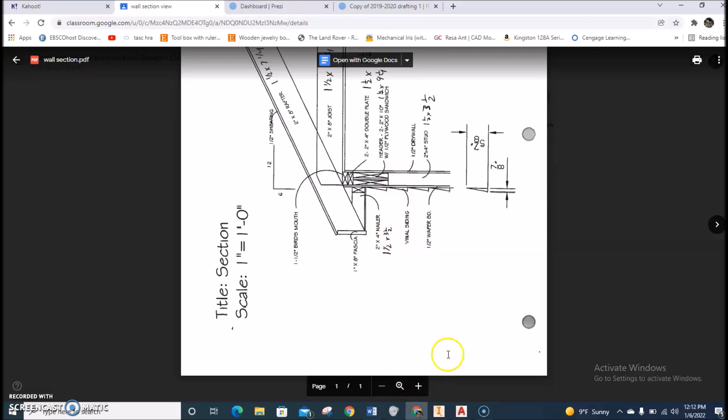Okay, so you're going to be doing this section view drawing right here. I will fix it and make sure it is facing upright. I thought I did that once, but apparently it did not like to be rotated. So, or just use a hand sheet that I'm probably going to give you if you look over your shoulder.

I'll give you one as well. So, but I will refer to this one. Actually, I have it loaded somewhere else, so let me get that for you. And there it is. So, you are welcome to use this. I will refer to this quite often throughout this process.

Just so you know, I'm also doing this at my desk right now. I might be at my desk. You don't know where I am in life right now.

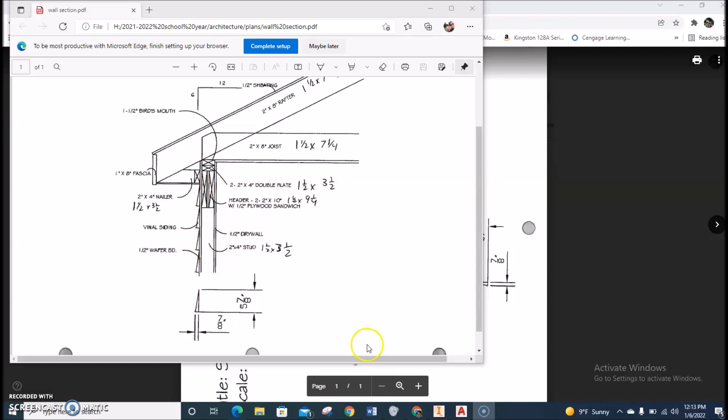But remember, it is one inch equals 1 foot. So that should be pretty easy to be able to figure out how tall these things are. So if you want to reverse engineer this, which we will need to, otherwise follow along and you'll be good.

Highly recommend, if you did the last template, to download this one. I fixed some of the text. I hope so, so that won't be such a pain in the butt this time. If not, I'll reload it later on, but it'll be fixed by the time you do it.

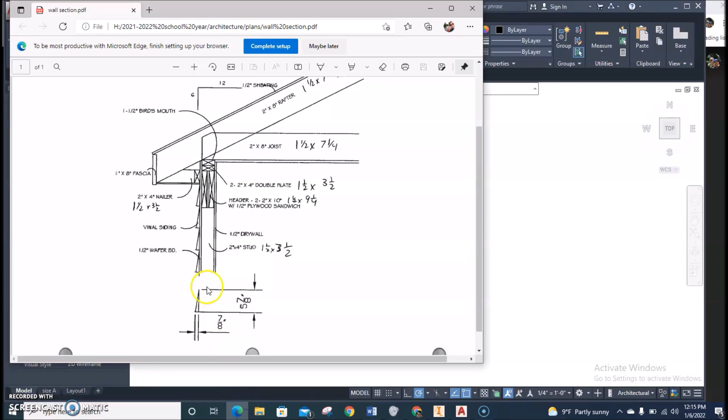So first thing we're going to do is we're going to start off by drawing this wall right here. So as you see here, there's a 1/2 inch drywall, which is actually 1/2 inches. There is a 2x4 stud, and some headers and some double plates and some siding and stuff like that. So I will help you get this lined up.

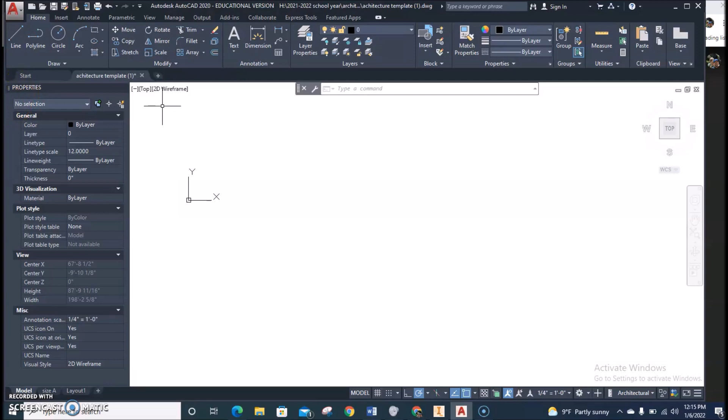Okay? So here we go. You're going to start off, and I'm measuring this on my desk, so give me 1 minute to get your first measurement on this one, and it is 2 feet 6 inches. So your first line is going to be 2 feet 6 inches going up, and that is the side of the wall. We're going to offset this in 0.5.

So click and go to the left. That's my drywall. We're going to offset again, 3.5. Click here, go over, click. There you go. That is your 2x4.

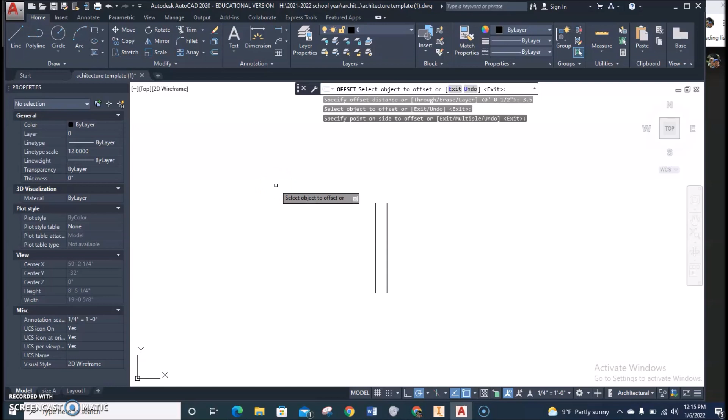Remember, the 4 inches is not 4 inches. We live a lie. It is actually 3.5 inches. So next, we're going to offset 0.5. This is OSB. If you don't know what OSB is, that is particle board, the short term for that. So that is.

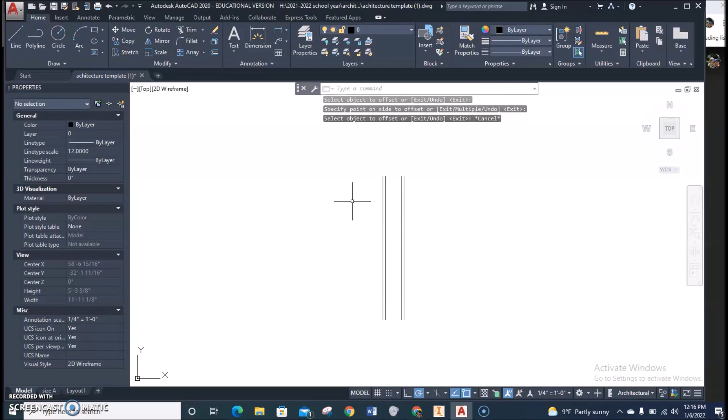Going over there, and I'll do the vinyl last. That's the least of my concerns right now. I will do that later on. So now we have our.

Wall complete. Now we need to work on getting in the headers as well as the double plates on top. So next step is to work on this area right here. Before we can move on, we need to draw the top part of the ceiling right here, which will give us this little double plate height right there.

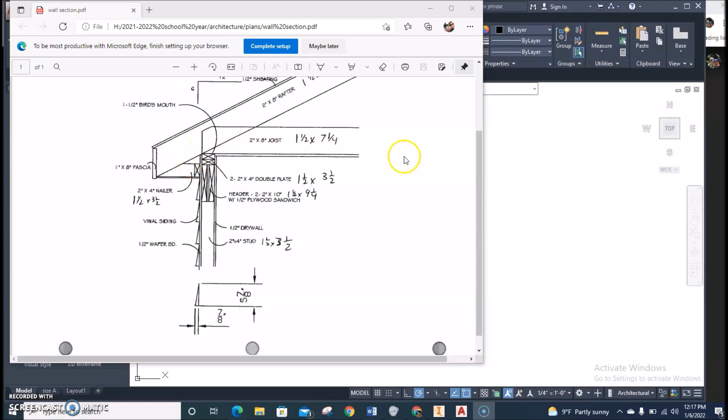So that is, once again, 1/2 inch drywall. So what I'm going to do is I'm just going to draw a line from the inside of the drywall over. Doesn't matter how far, not really, but if you need a measurement, I think I'm going to go about 3 feet. Yes, 3 feet over.

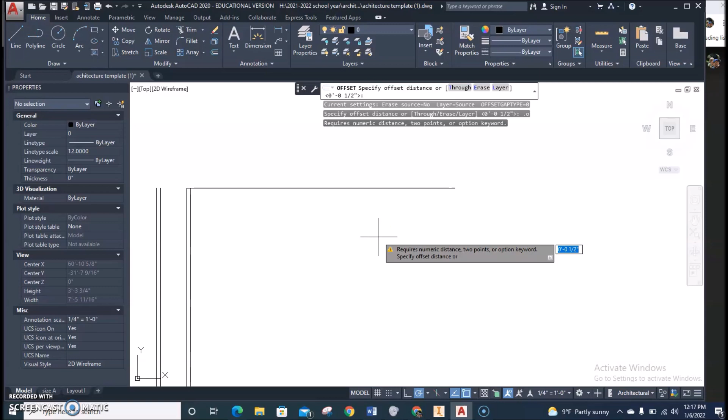About right there. Then offset that up, 0.5 again. It's already set. And now we have the top of what will be our double plates.

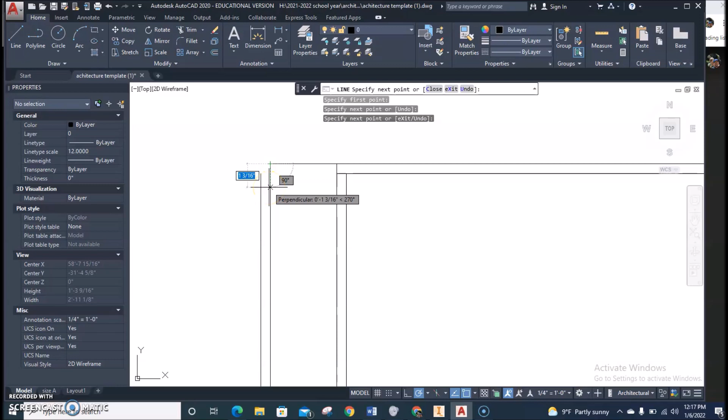So here we go for double plates. I'm going to extend this line going up here. Then this is the same width as this, so you can just go down like so. Okay, so this is 3.5 inches already because it's a 2x4 as well. I'm going to go down 1.5 inches, 1.5.

And attach that, then draw the little X here. I don't care if I overline this. You won't see it, no one will. Okay, we're going to do that one more time down here.

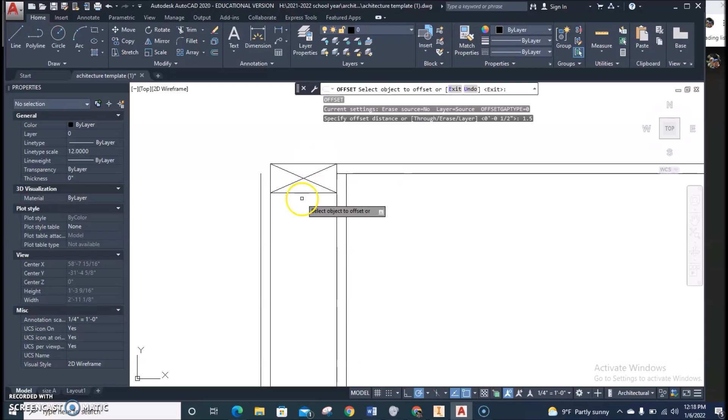I could make a copy of it, but it's just as fast just to draw it. So down 1.5. Actually, I should just offset. Offset 0.5—not 0.5, I'm sorry, 1.5. Take this bad boy, go down, draw the X.

Next are the 2x10s. Here's how we're going to do this. We're going to offset 1.5. We're going to take this wall and go to the left, and take this wall and go to the right, and you should have a little gap in the middle. Before I go any further, I'm going to trim this stuff up here.

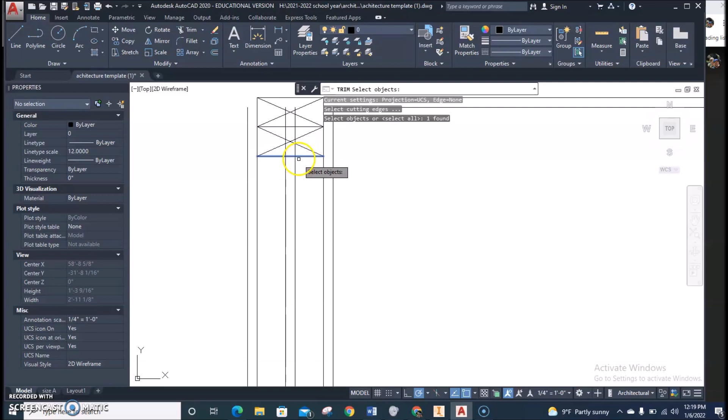And when I trim on these, I'm going to just hit TR and press enter once. Click this line here. If I press enter again, it will let me do a fence trim and get rid of all the rest of the stuff, so I don't have to worry about that. Okay, the height of these is the same, so they are.

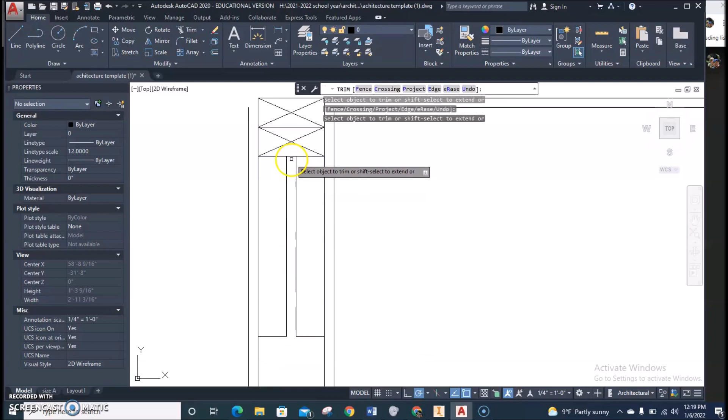9.25, so type offset 9.25. Click here, go down, trim it. And there we go. Draw your X on both.

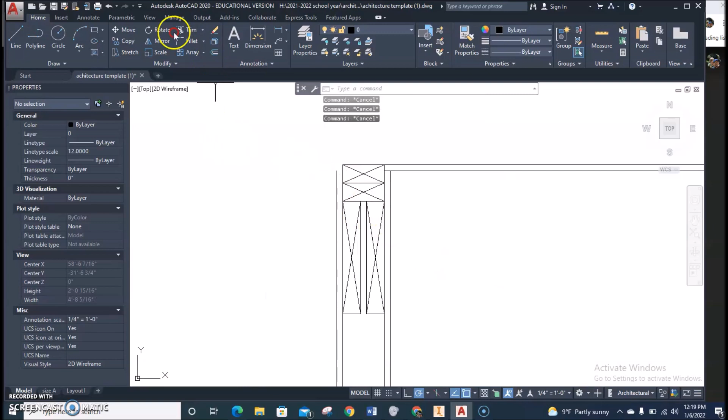And then you're good. It appears that this attaches to here. And we're good to go there. So you got this part done, hopefully. Hopefully things are rolling well for you in life and everything else. I'm going to worry about this area once we get this part over here done. I'll give you a minute to get caught up, and then I'll see you in a second.

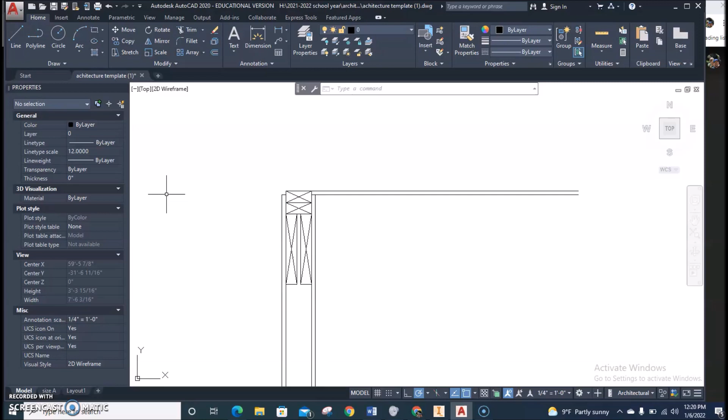All right, next we are going to do what's called a fascia. The fascia is this area that goes out from the house. It's not labeled on the sheet, but that's what it is, so trust me.

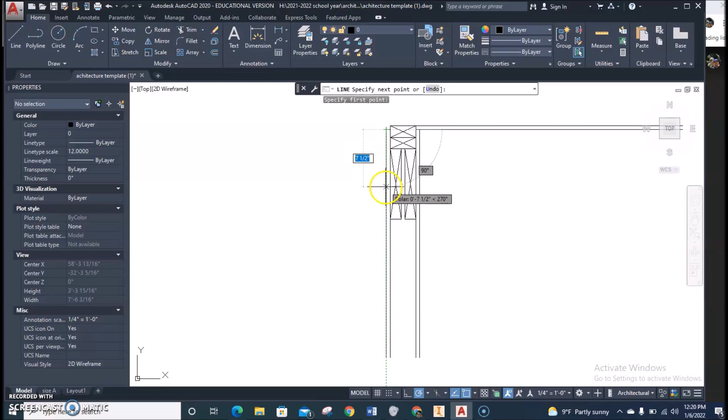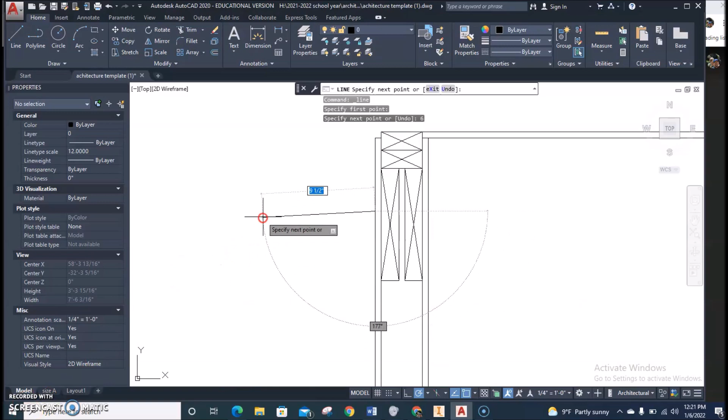So to draw this, we have to go 6 inches down from right here. If you click on this top corner right there, go down 6 inches. And then you're going to go out 1 foot, or 12 inches. And I'm going to press escape there. Next there's a small little board that goes underneath it.

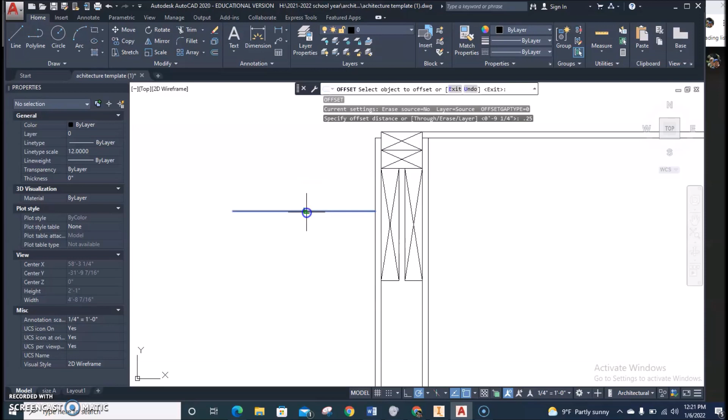I'm going to offset that 1/4 inch. That's just, usually that's the sheet metal that goes on there. We'll just make it simple right there. There we go. And then I can go ahead and attach this line right here.

Okay, next is something called the fascia. The fascia is the front of the house. I always think fascia and front are kind of the same thing. But I know it looks like there's a little bit of a ledge overhang, but I'm just going to tack this right up against here just to keep my life simple.

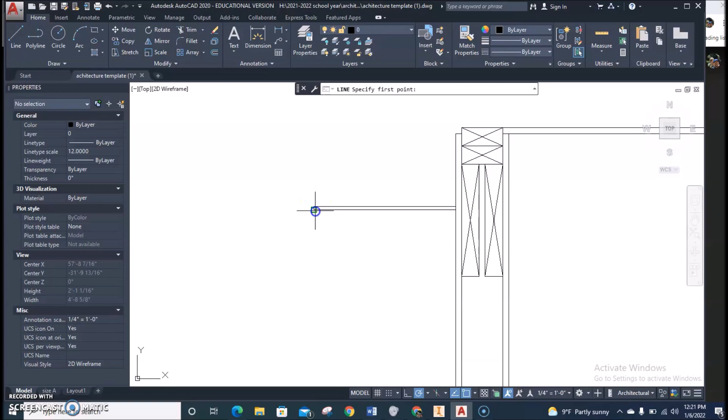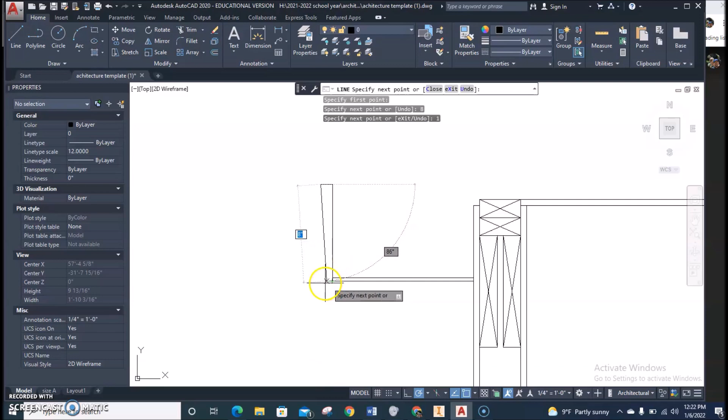So click on the bottom left-hand corner of your box here, go up. Now, a fascia is exactly as shown, it says 1x8, I need it 1x8, so go up 8. Go over 1. And box that out if you could, please.

I'm good with that. Okay, next is the roof. So if you're looking at your sheet here, so we got this part done there. So there's a 6-12 slope.

Now, if you're doing some geometry here, solve for the line or the angle, blah, blah, blah, we don't do that in my class. We do it the easy way. So here's how you're going to do this.

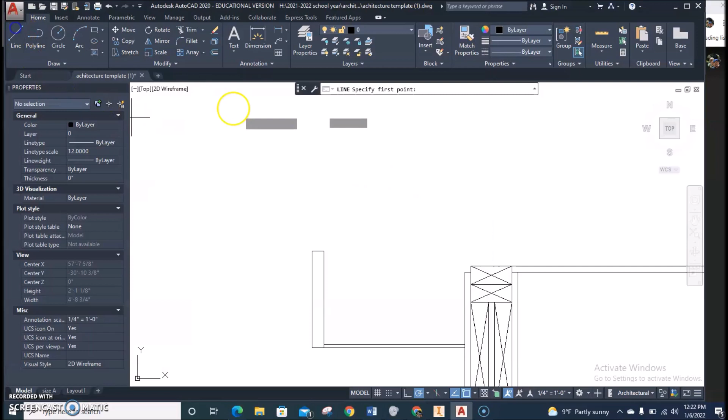I'm going to click on this corner right here. You're going to go up 6 inches. You're going to go over 12. Slopes are always something-12. So this one is 6 and 12.

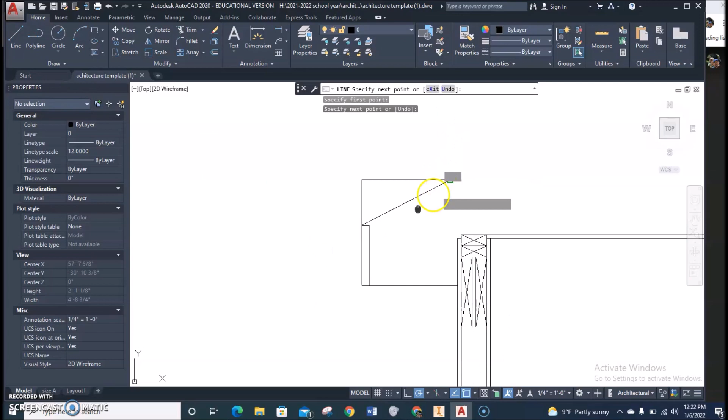So then what I do is I grab this, and now I have my line, and now I have my slope. You're thinking, great, that's fantastic. How do I get it to go higher? Well, that would be the lengthen command.

Remember this command? Did this back in the day? All right, you want to hit dynamic. What that does is if you click on it, it allows your line to be extended out without you changing it. So it doesn't matter really how far up and down I go, it just tries to keep with my line. So that's where I want to be at.

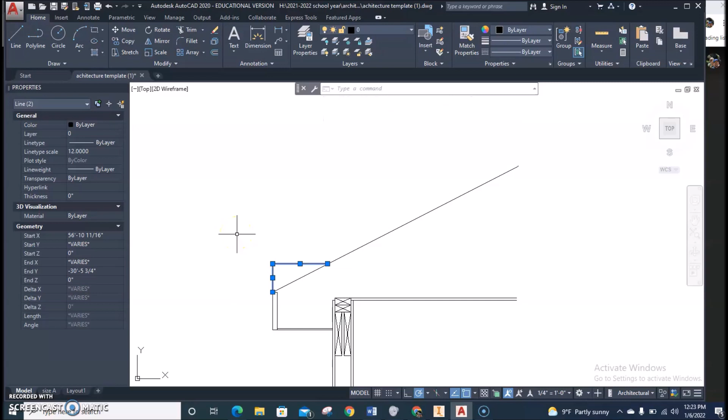Now, as for this, don't erase this, I need this still. I should slow down a little bit, I'm sorry, I'm going a little fast. We need to move this because this is going to be one of the things we use for notes later on, okay? So keep that.

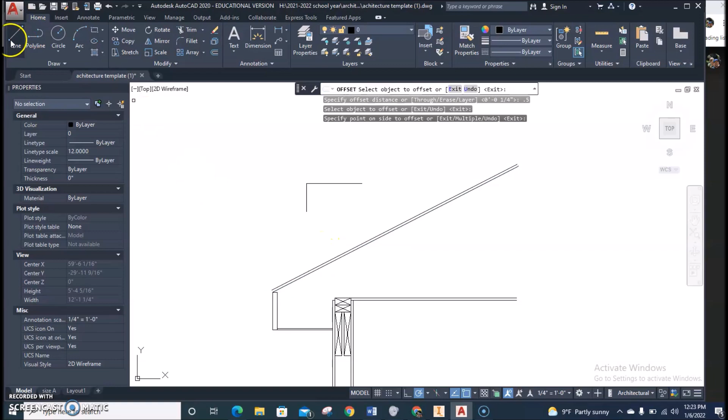Okay, next is the sheathing, which is your thickness of your roof. Usually that's an OSB as well. So offset 0.5, click here, go ahead and close the bottom part off. The top part can stay open because that should be a break or something like that, which I'm not going to worry about with something that small. Okay, you got that finished.

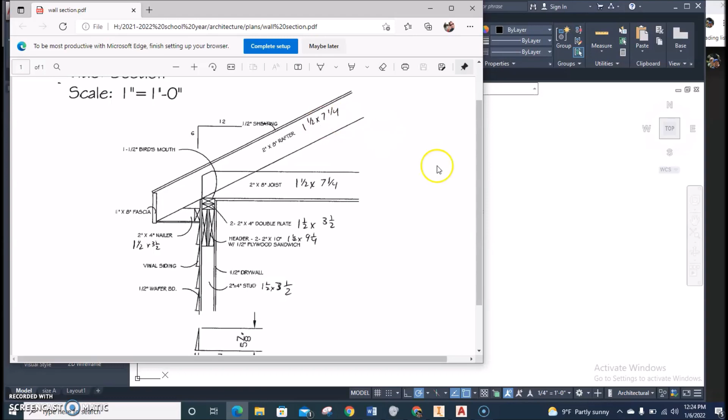Now, we need to have a rafter here, okay? So on my sheet, it says there's a rafter here that is a 2x8. 2x8 is actually 1 1/2 x 7 1/4. So offset 7.25 and click. Ooh, that went right on the edge.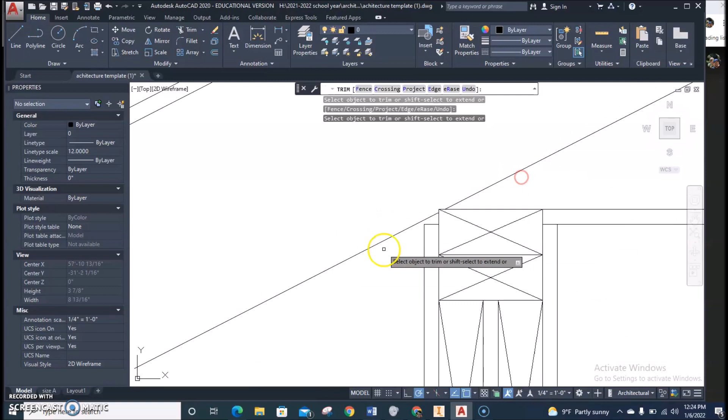That is perfect, good enough for me. Typically what you would do in this case is you would trim off this area here, but if you're not watching the video, it's fine. And then I'm just going to hold shift and extend that out to there, and that is absolutely beautiful.

Okay, we only have a few more things left to do here. Next is the 2x8 joist. So I am going to just leave my offset to where it was, which was 7.25. Press enter, click that, go up and click.

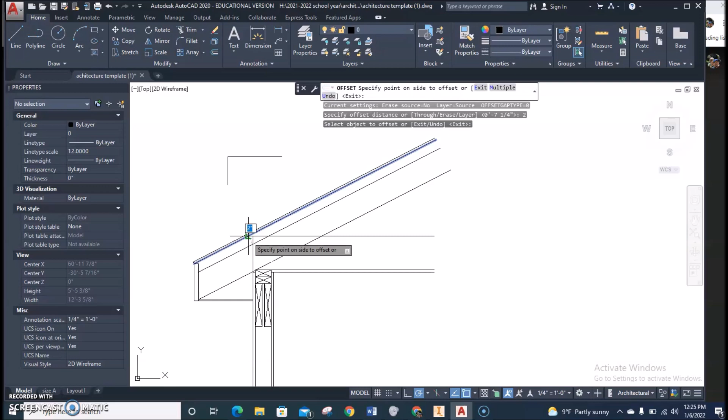Now I'm going to do a little fillet because I want to attach these two, but I'm going to do something else to it here in a minute. So fillet, boom, like this. Now you'll see how it's at a little bit of an angle on your sheet, so I'm just going to offset that down. Let's go 2 inches because it cuts into it.

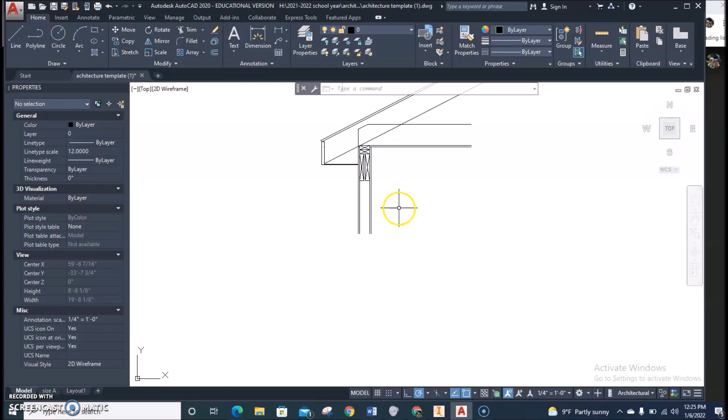So here's how we do that. We're going to start off and draw a line. I'm going to do mine over here on the side just so I can copy and paste it, make my life easy. I'm going to go over 7/8, so 7 divided by 8. It would help if I would have drawn a straight line. 7 divided by 8, go up 5.

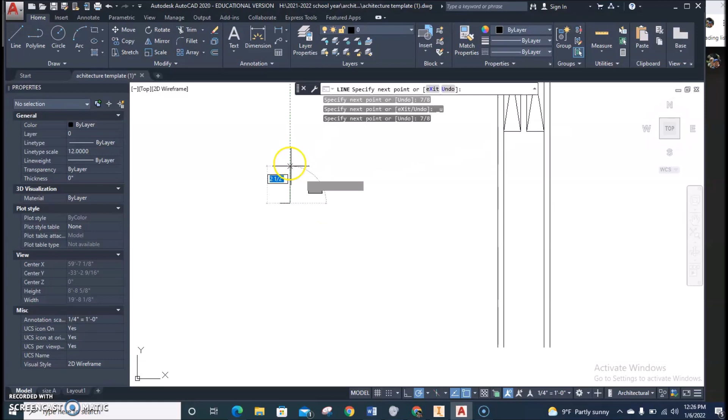Now here's how you do it in inches, or you can just type in 0.875 if you want to. But it's dash 7 divided by 8 is how you do that.

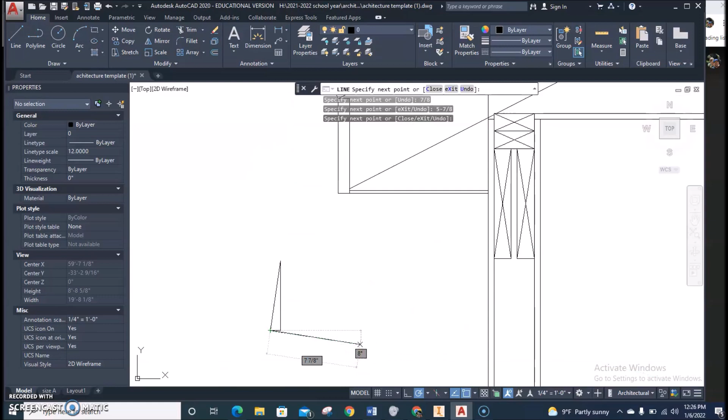I'm just going to go ahead and attach this. Okay, now here's all I'm going to do. I'm just going to copy this, so CO for copy, press enter, choose the top of this. Start clicking up here and just follow it down until you run out of space. Cool? Looking good, looking good, looking good.

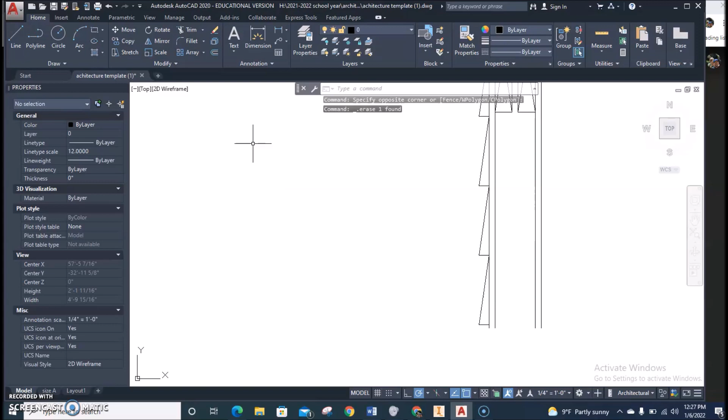Okay, so the next step of the video will be text, and we're going to start that here in just a second. Last but certainly not least is the text.

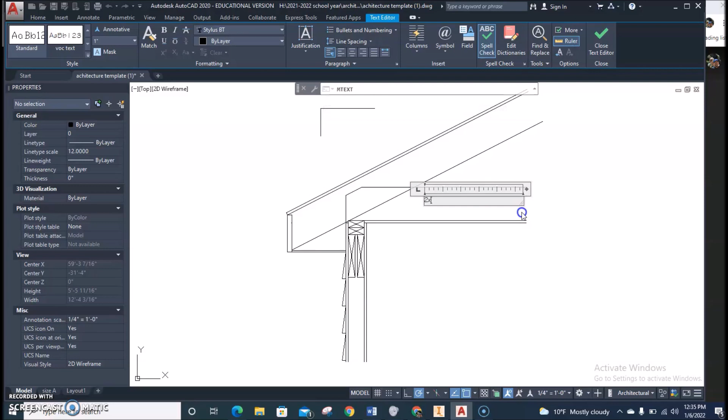So here's how we're going to do that. You're just going to click this A right here for most of it, and all your settings should be good if we're using my template. The new one, not the old one. Make sure you use a new one, otherwise they're going to be humongous. And this 2x8 joist, you don't have to put the inch symbol.

I don't even care if you turn them red. Same one is used here. Well, no, actually, that's a 2x8 rafter, so sorry about that. I don't care if it's at an angle or not. So I'm just going to draw this out here.

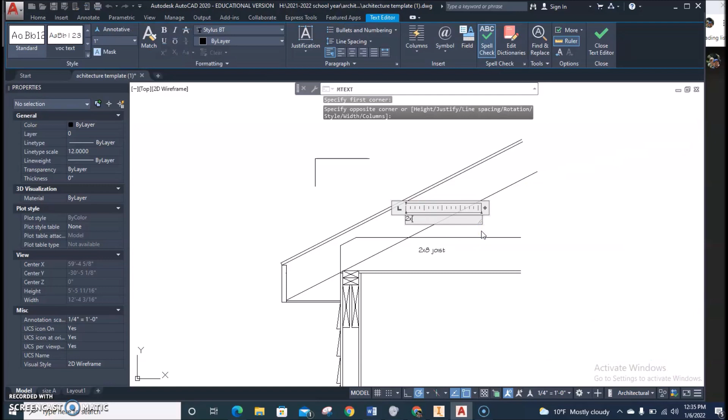2x8 rafter. If you wish to angle it, you could always click this dot here, right click and go rotate, and you can do that. It's up to you. Okay.

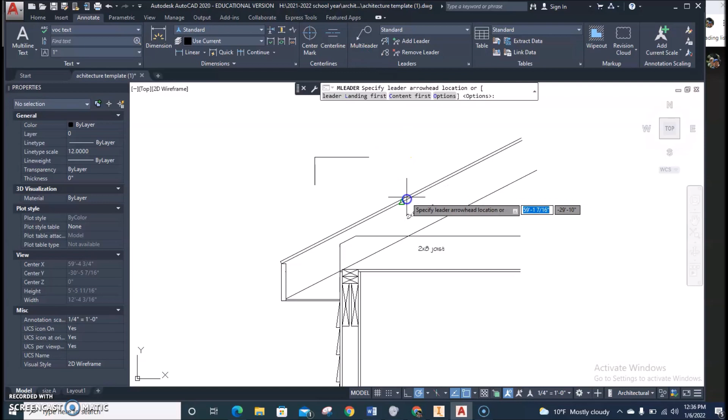We need to do an arrow next, and there's two ways we could do this, but I like using the multi-leader feature here. Okay, we're going to try this again here. Click on this top arrow part. There we go. And this is called 1/2 inch sheathing.

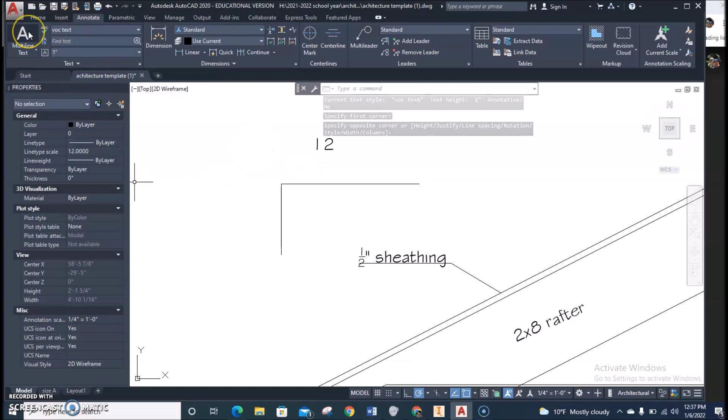Okay, there's measurements right here. Now, you can do a dimension, or if you just want to keep doing text, I just keep doing text. There's a text feature right here too. I'm just going to go up here and put 12. The inches don't really matter. In fact, you could have 24 there and just multiply the other one by 2. It doesn't really matter as long as it is divisible by 12 in some form or another. So there we go. All right.

So we got the fascia right here. So I'm going to click here, 1 by 8 fascia.

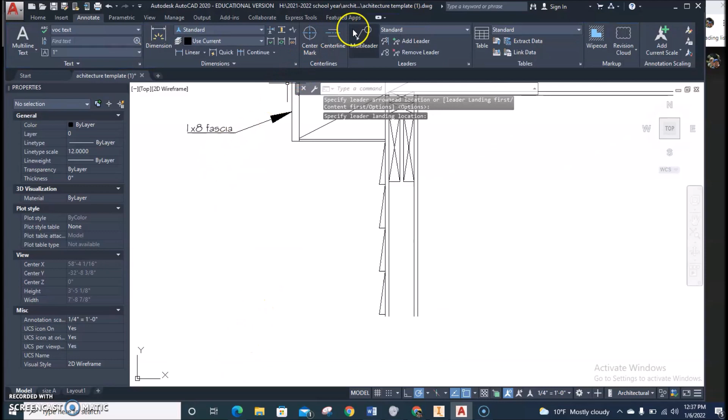Okay, under here, a nailer. Oh, looks like I missed something here. Look at that, I missed a 2 by 4. So 2 by 4 nailer. No, looks like I missed something right there. Missed 2 things. Whoa, I'm off my game here.

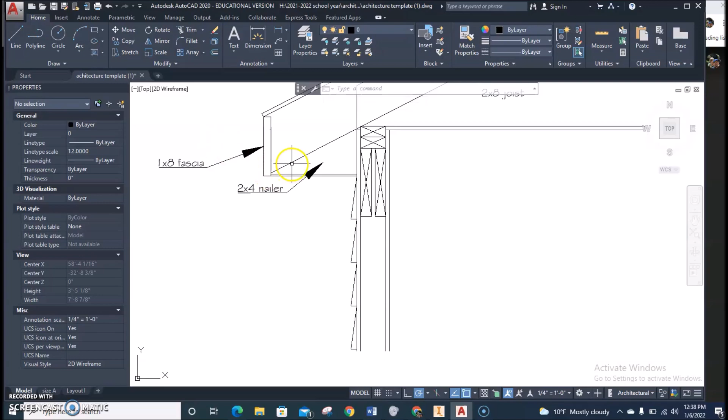So we're going to offset because I forgot to put in this part right there. So we're going to do that right now. So offset 3.5, like this, go up. Do a trim because this does not go into our roof.

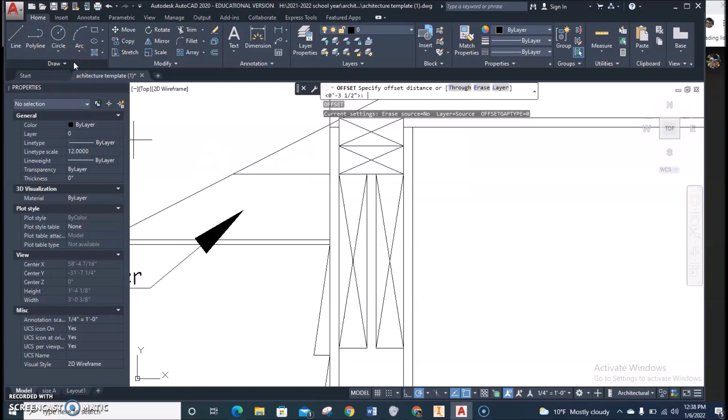And then we have a little header right here. In fact, I'm not going to offset, I'm going to draw a line so I don't have to trim. So I'm just going to go here, over 1, 1.5, go straight down here, click, bada bing, bada boom. That's done now. That looks way better.

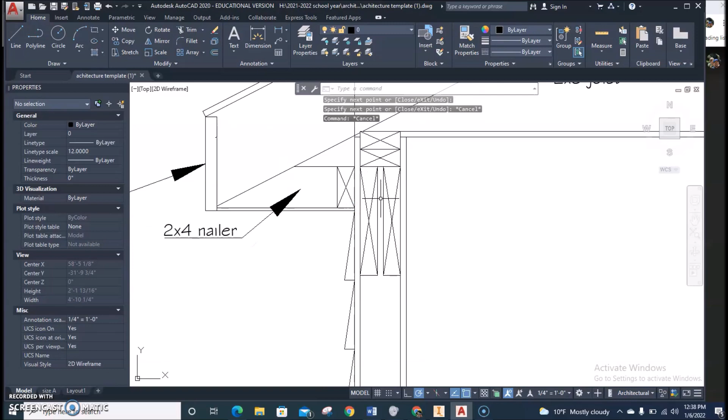Alrighty, and then the rest of the text we're going to put in here. So right here is 2 2x4s. 2 by 4 double plate.

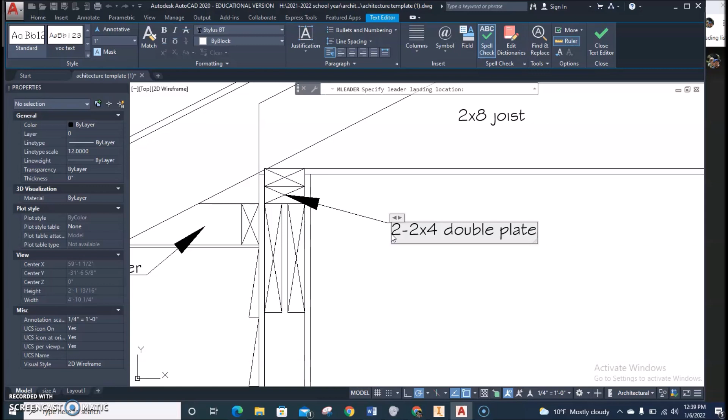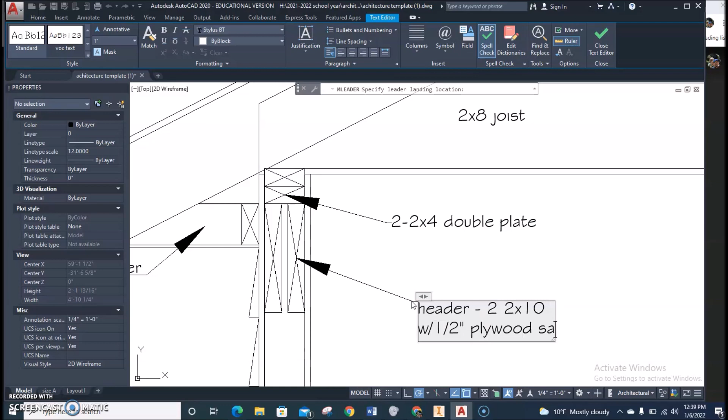And then next, we got a header. 2 by 10 with 1/2 inch plywood sandwich. What that means is there's a piece of plywood between these two, which means I have to draw a line right here because there's a 1/2 inch in between there to help keep them together.

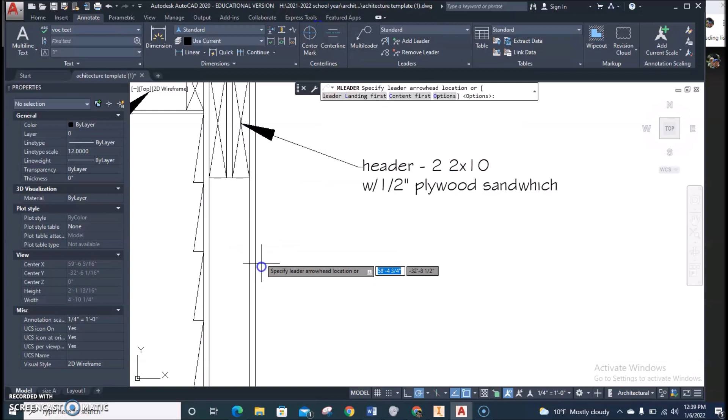I forgot about that. All right, sorry, I didn't do this one before. Okay, another piece of drywall right here, 1/2 inch drywall.

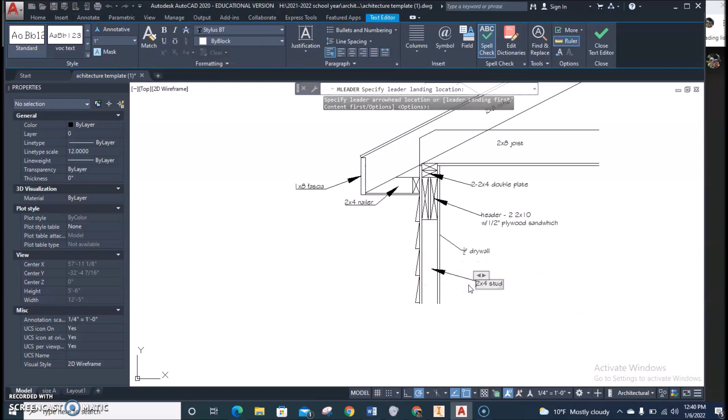We're getting there. In the middle here, 2 by 4 stud. And last but certainly not least, we have it's called a wafer board, 1/2 inch.

And then finally, vinyl siding. Okay? If you got those done, you are finished with this.

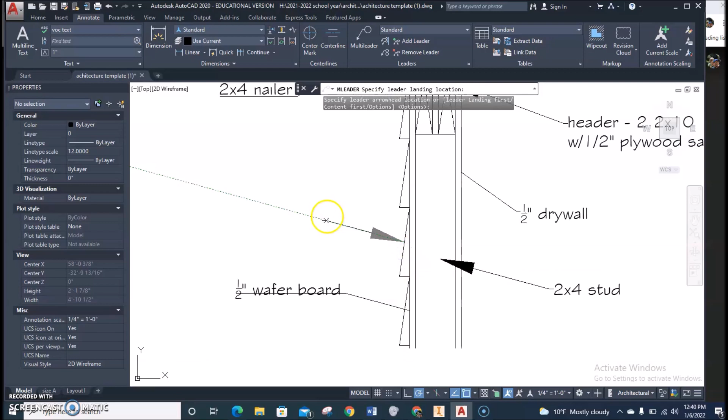Next thing to do is work on your term sheet. So once you get those in, you're finished with this part of the assignment. Upload this, make sure you put last name, wall section, and then you are good to go.